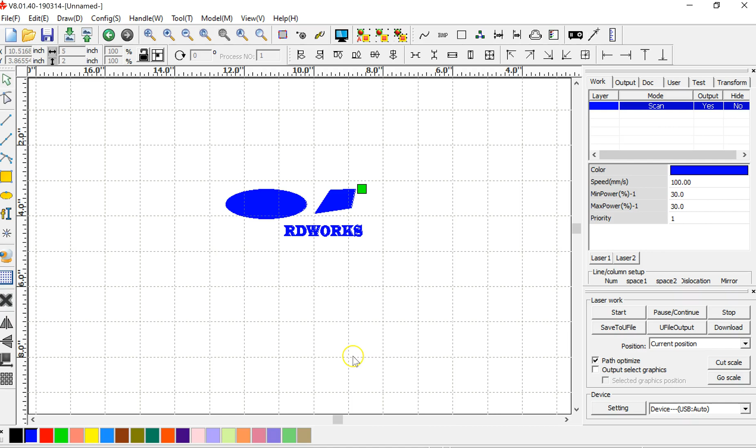So we left off with doing some basic shapes and stuff. I'm going to get rid of these and leave this text here.

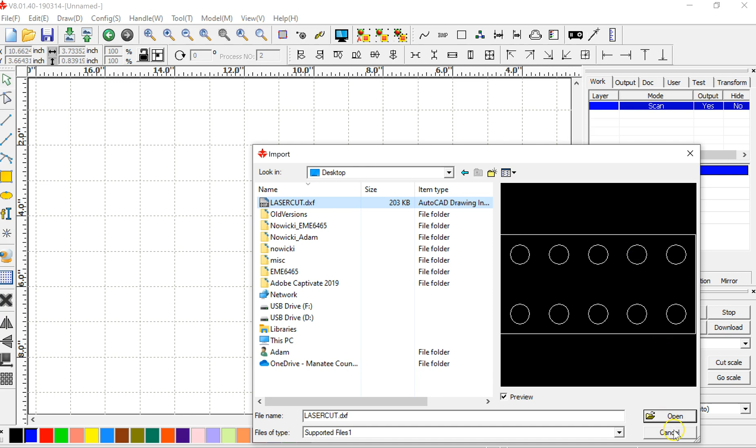Now I'm going to import a DXF file, one I made in Inventor. You can see the preview, and when you click that, you know it exported correctly. Here's the file, it should be 10 inches by 5 inches. Yep, there it is. Let's say this is a board I want to cut out. I can drag and select everything here, and start it an inch in or so.

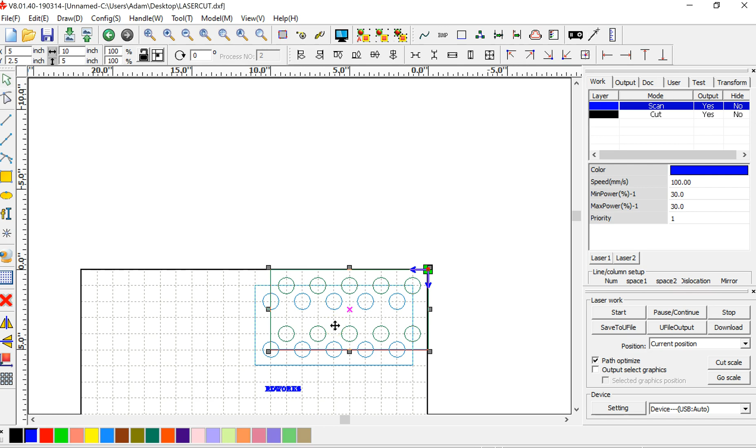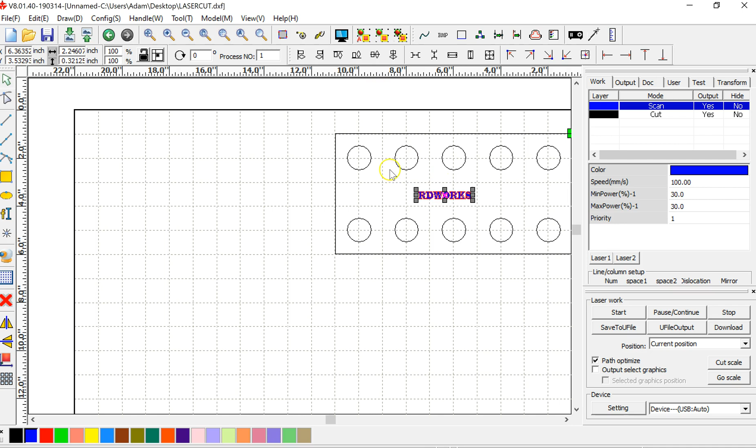Let's say my material is a little bigger than that, and this is what I want cut out. Let me zoom in here, grab this text, and let's do some alignment stuff. If I click here, let's say I want to click these things.

Whoops, I can align this to this. Let's see, I think it's this one, and then I select the next one. Or is it shift click? There we go, I think that's how it does it. So whatever I select, it'll line it up if I click on these alignment options. You have center vertical, center horizontal, and if you want it at the bottom of something.

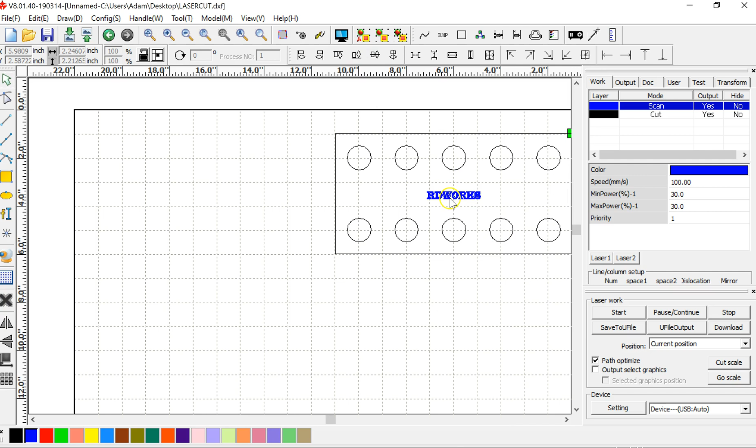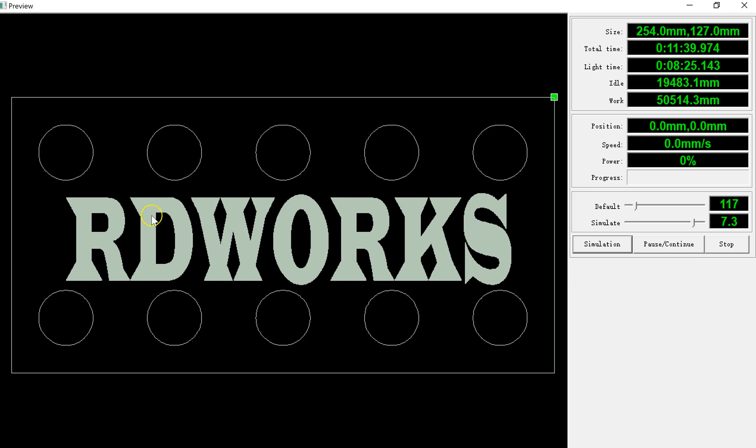But now I can actually play around with this font, and let's say I want to make it so that... so what would happen here is this would cut out, all these circles would be cut out, and this would be engraved in. Alright, so here we have our different settings.

And then it would engrave this in RDWORKS. So let's say, for example, I put a piece of wood in that was, say, that big. Whoops, I just realized I didn't want to color that in. There we go. So let's say this is the size of the wood, and I want this piece cut out of that, along with these circles. So it would do those cuts, and then engrave the text. Actually, it would do the font first, then do the cuts last, because that's the priority I have it set in. Alright, pretty cool.

You can do your advanced layout and advanced things. So what I did was create a rectangle in Inventor, and just did a circle and then a pattern. There's more advanced stuff you can do in Inventor as far as shapes, and then do other things in other CAD programs, and just add your fonts and get it all ready in RDWORKS.

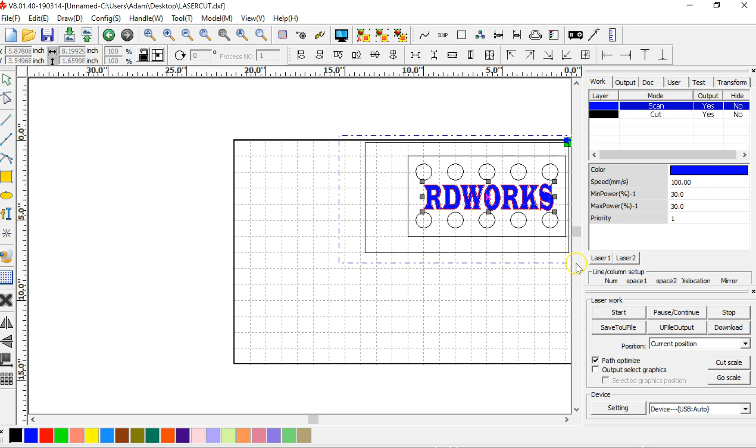And there's other tools and stuff you can play with, like splines and curves and multi-polygons and all that stuff. But for this purpose, it works just fine to import the DXF and then add the font.

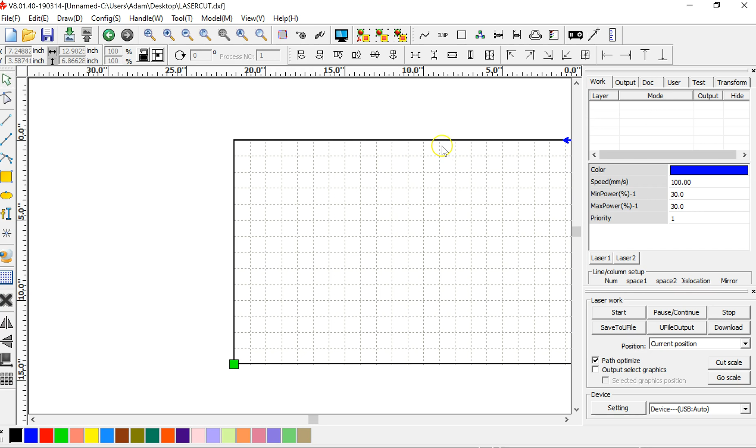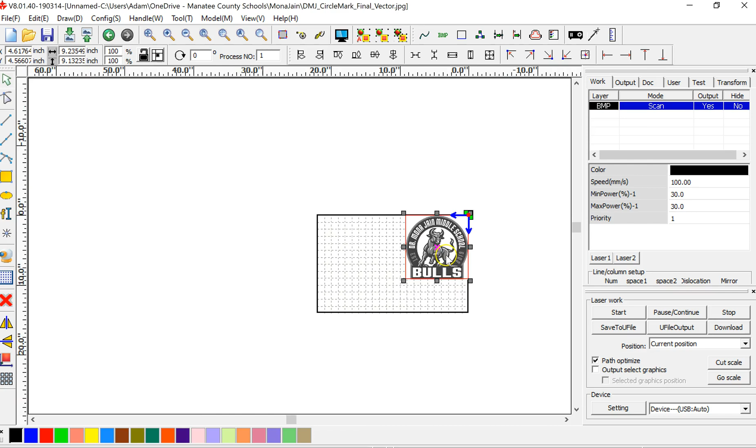The other thing you can actually do is import an image. So if I go to here, I think it has to be, it could be either one. Let's say I wanted to do this logo. And if I click this, there we go, it would actually engrave that into whatever material I had. Alright, and that's just having a JPEG.

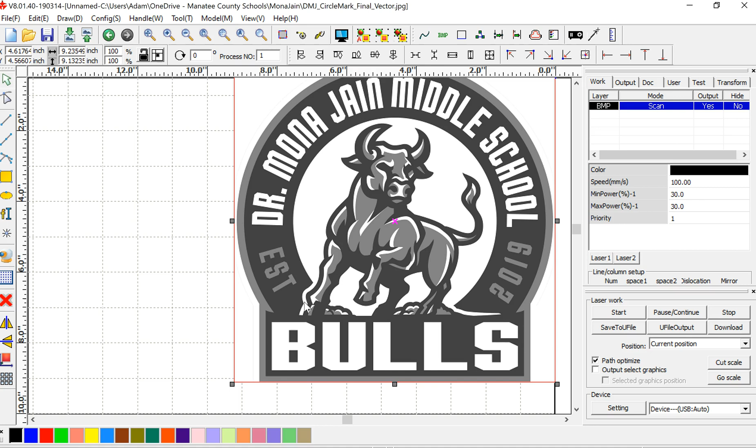But again, it's already separated out color-wise. There's no shadowing. These are definitive lines and definitive colors, no gradual or those kind of effects. So keep that in mind when pulling in images. If you are going to pull in an image, make sure it has these definitive lines. All right, that should be it.

The next thing we need to look up would be these colors for cut settings. So if we have acrylic and we're going to cut it, it would be set at these settings for 60 watts. If we're going to engrave it, it would be this setting. And then that's how you set that up.

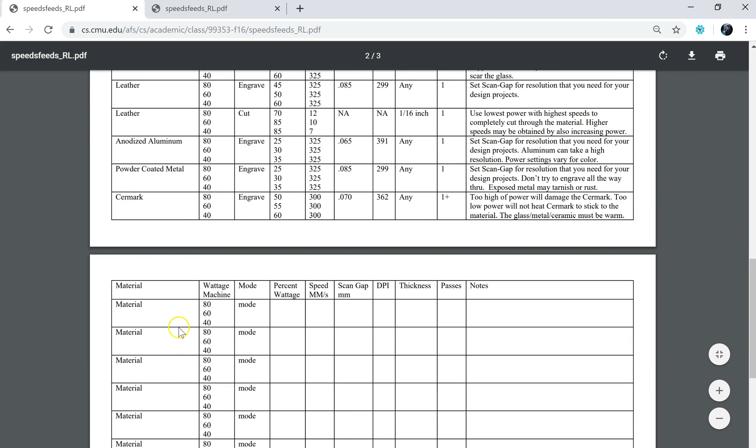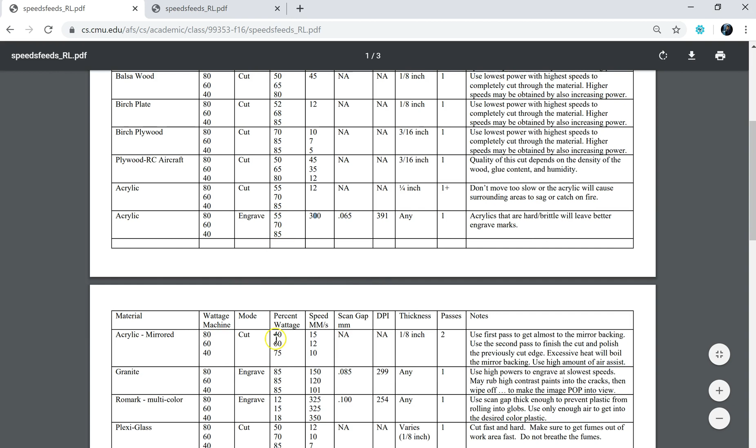There's different settings here, leather, mirror, that kind of stuff. The only other thing is to be very careful about what you are also engraving. Be aware of the materials. There are some materials that are no good, and they'll actually corrode and deteriorate your laser engraver. So make sure you're checking the website for whatever laser engraver you're using, and make sure the material you're choosing is able to be cut or engraved.